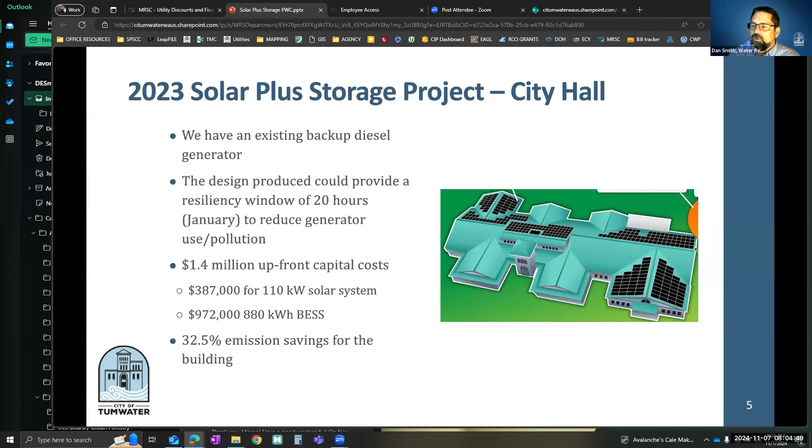It has an upfront cost of about $1.4 million, which is fairly expensive. So we are actively looking for additional grants to help support the construction of that project, plus the project for the library. Overall, they're anticipated at 32.5% emission savings for the building by constructing that project and making it active.

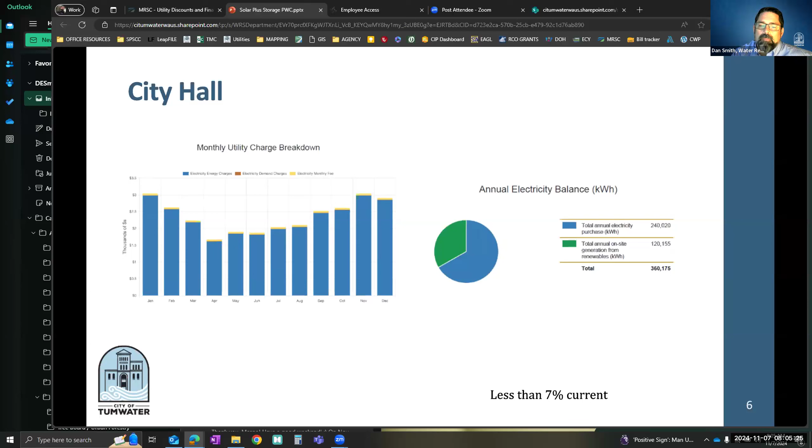What we see here is that the solar power we do have on the City Hall facilities really provides us about less than 7% of our total operating electric needs. Regardless, you continue to build into these systems. The additional solar panels will add additional power, and the backup with the battery gives us power, not necessarily just in terms of power outages, but also when power is less available from a solar perspective.

On the library building, the library is really the only heating and cooling shelter the city has, and there's no current backup power on site. So this project would add an additional resiliency window of about 22 hours.

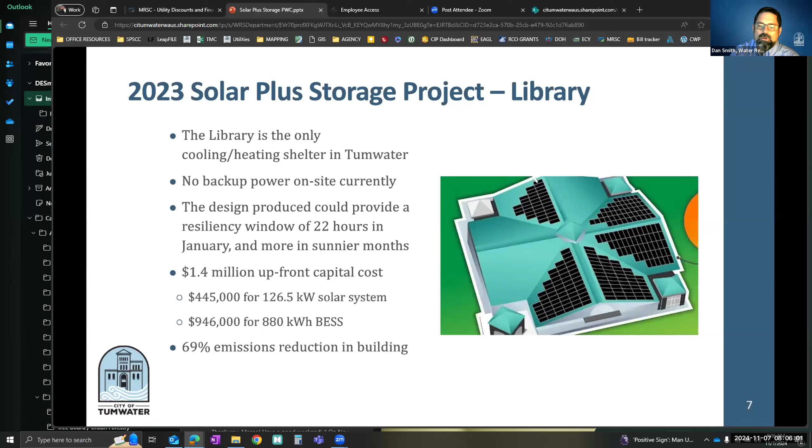It also has a $1.4 million upfront capital cost. As with City Hall, this one has a higher priority, and we're looking for grants to actively initiate this construction. It converts to a 69% emission reduction for the building once this project is able to go active.

Again, you can kind of see what would result in basically a zero power bill in the summertime when those systems are active, whereas City Hall has a much higher power demand, given all the staff and computers and all of the things that City Hall does.

The library has a lower power demand, and these facilities would actually cover their energy demand in the summer, which is fantastic.

So as I mentioned, we're looking to get some grant funding. Ideally they'll cover 70%, if not more, of those total costs. And with the new direct pay program that finance, legal, and lots of folks around the city have helped implement,

we'll be able to get 30% of that cost recouped through the IRA direct pay program. So now moving into the new storage and feasibility project, we're looking at receiving some grant funding of $50,000 with no city match, based on Washington's Climate Commitment Act.

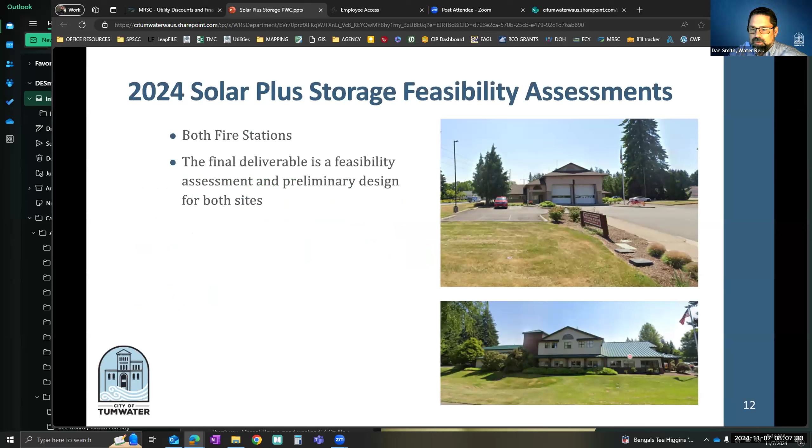So we're looking to put that into work at both the city's fire stations, and very similar to what you just saw for both the library and City Hall, those are the same kinds of feasibility assessments that will be done for both the fire headquarters and the T1 building.

And I know we are going to be working with Olympia Community Solar as part of that project. This is really just a request for the commerce agreement to make sure we can get the grant going. And this is the grant agreement with Commerce.

So the request for you today is to place the interlocal agreement with Washington Department of Commerce for Tumwater Fire Station solar and storage feasibility on November 19, 2024, City Council consent calendar, with a recommendation to approve and authorize the mayor to sign. I believe that's it.

I will just stop sharing and stand available for whatever questions you might have that I might be able to answer.

Michael, I don't think I have any questions. Straightforward, thank you. Appreciate that.

I just wanted to say, when I was reviewing the minutes, I saw something that caught my attention: based on the fleet electrification forecast, the city could reduce its gasoline consumption by more than 70% by 2030, which is amazing. So I just always want to call out the things that we're doing and that we are moving the needle, and just want to recognize your work and Alyssa's work on this as well. So really appreciate that.

So we're moving ahead. All right, well with that we have a recommended action before us. Do we want to go ahead and read that again, or just go ahead? I move that we adopt the motion as presented. I'll second. All right, all in favor say aye. Aye. Aye. All right, thank you, Dan.

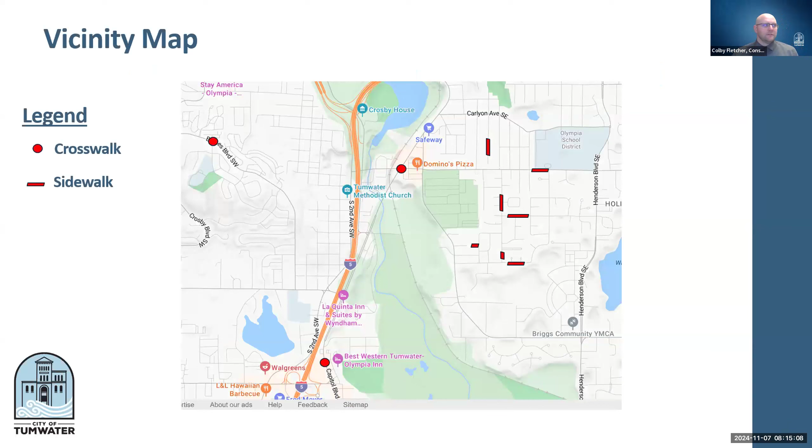So for the pedestrian crossings, let's talk about all 3 that we did. We installed a rectangular rapid flashing beacon right here on Barnes Boulevard at Ridgeview Loop. This one previously did not have any signalized pedestrian crossing, and we did this one specifically because the Tumwater School District approached us about it.

They entered an agreement with us as a city to install this. So this is the one at Barnes Boulevard — it's a solar panel application.

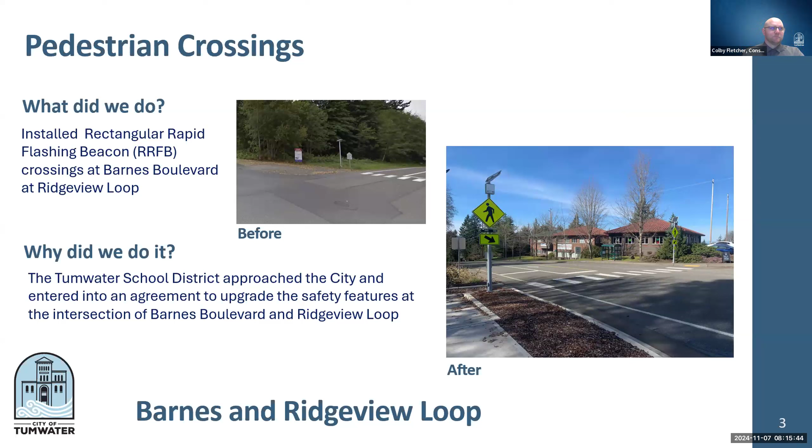The second pedestrian crossing that we installed was right here in front of KFC and Happy Teriyaki on Capitol Boulevard. This is again a signalized pedestrian crossing. This being a multi-lane roadway and heavily traveled,

this one was prioritized, so that's the reasoning behind it.

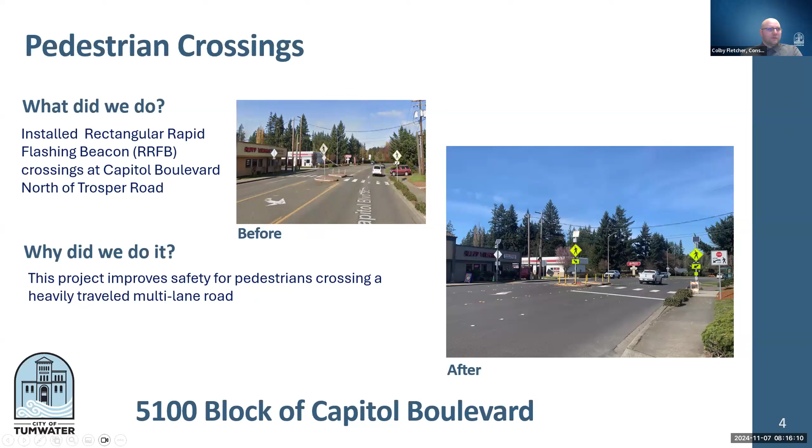The third pedestrian crossing that we installed was the south approach at Capitol and Custer. This one was signalized as part of the actual intersection signal.

My understanding is that we were reinstating this one as part of this project because it was removed from a previous project the city had done, and the funding wasn't secured at that time. So that's the reasoning for this one.

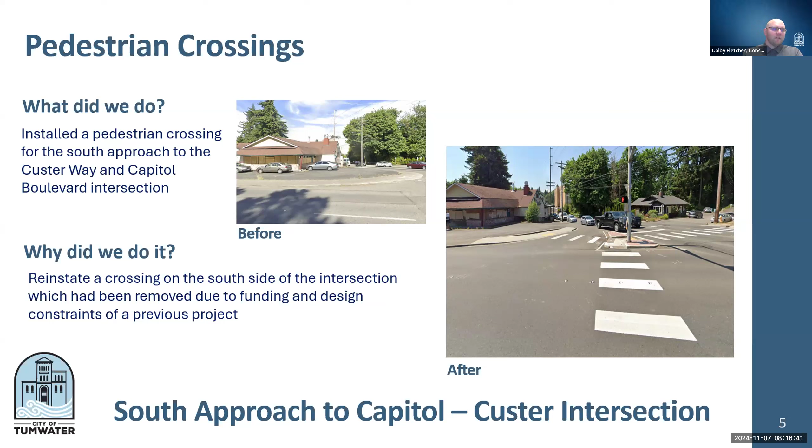Moving along to the residential streets and sidewalk improvements. There were a lot of sidewalk deficiencies that we identified prior to my hiring with the city, taking this project on.

We did this for walking and rolling on residential streets. Prior to my time, the funding was secured, but residential streets are generally harder to secure funding for. Some of our other projects have federal funding, so these were prioritized for that reason.

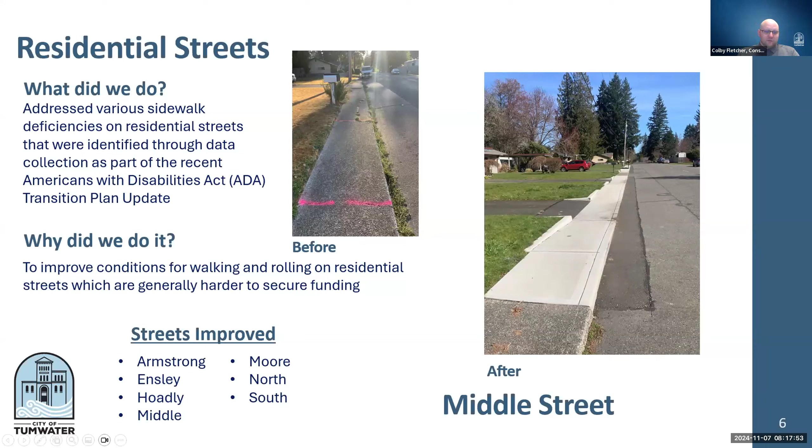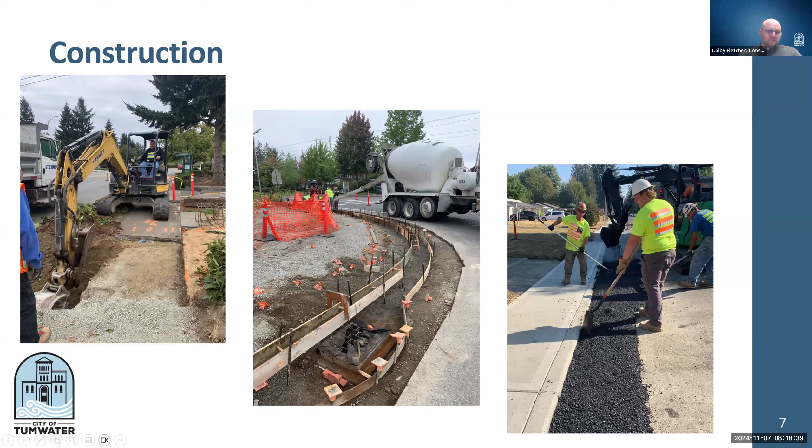Construction summary and project timeline: this was a 30 working day contract. Construction started on September 6th, 2022. Substantial and physical completion were issued on the same day, July 10th, 2023. This project had electrical items, so the reason for the delay was electrical material procurement - there's a big industry lag for materials for electrical items, and not very many fabricators available.

The funding was provided by the Transportation CFP, the Transportation Benefit District, Tumwater School District, and the City of Tumwater. The contract was awarded to Sound Pacific Construction for $493,337, and the final contract total was $497,877.97. So with that, any questions?

I have a question - so the contractor will now be paid for work that was completed in 2023? Is that what we're looking at? It just seems like the contractor waited a year to be paid in full after the work was completed. Has this been normal?

Oh, okay - this is just more or less the final acceptance of work. I probably should have had this scheduled a lot sooner, but with Trosper Road and other projects... No worries, I was just questioning how this all works, no judgment here, just curious about the process. For all intents and purposes, they have been paid - this is just more or less the performance bonding and all that stuff has to do with this.

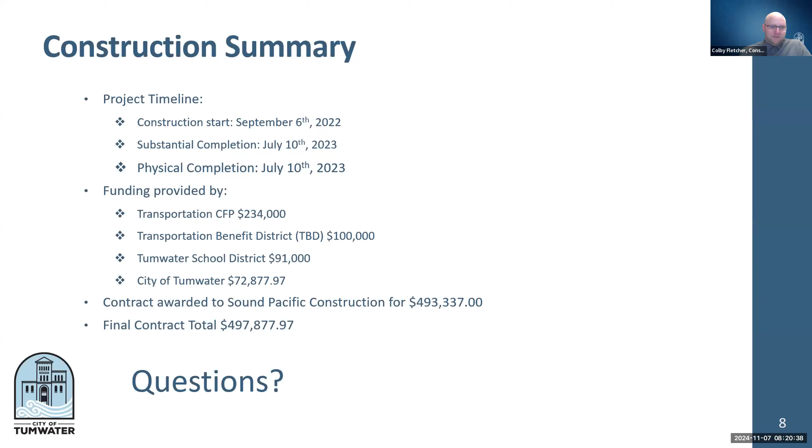So I can go to the recommended action as far as what we're requesting. The staff is requesting the Public Works Committee recommend the city council accept the 2022 pedestrian improvement project as complete and authorize the release of the performance bond as soon as the state of Washington laws allow. Sounds good.

Michael, do you have any questions or comments? I really thank you guys for the one on Barnes especially, because of the kids going back and forth from Tumwater Hill Elementary and the walkers - that's a good one, we utilize that quite a bit. Keeping our roads safe and pedestrians safe is really important, so I appreciate the work done on this project. We want people out there walking, so this is good.

So Michael, we have the recommended action before us. Do we want to read it again?

No, I guess my question is, for the council to accept it, that means we have to accept it on the consent calendar, correct? Well, or we could do it on consideration, but the motion, the staff recommendation is for the consent calendar, correct? Yeah, for the 19th. All right, I'll just say that aloud.

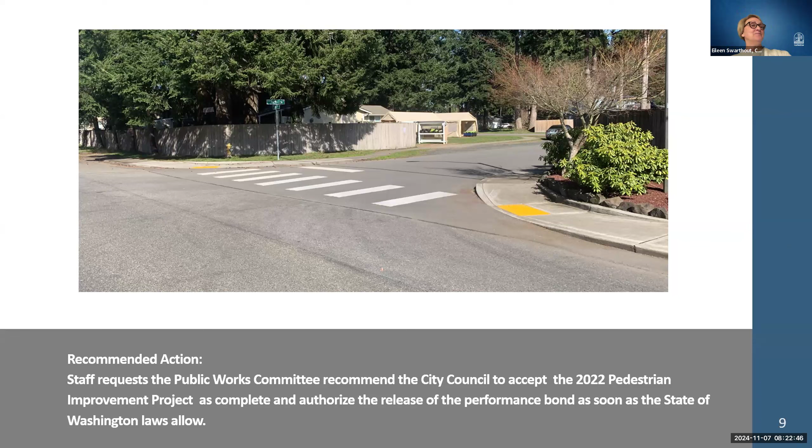All right, moving right along, back to my agenda. So next up, we have acceptance of work with Miles Resources for the 2023 pavement maintenance project, item number 7, and Colby, you're back up again. Yep, for the 2023 pavement maintenance project, acceptance of work, Miles Resources was our contractor for this one.

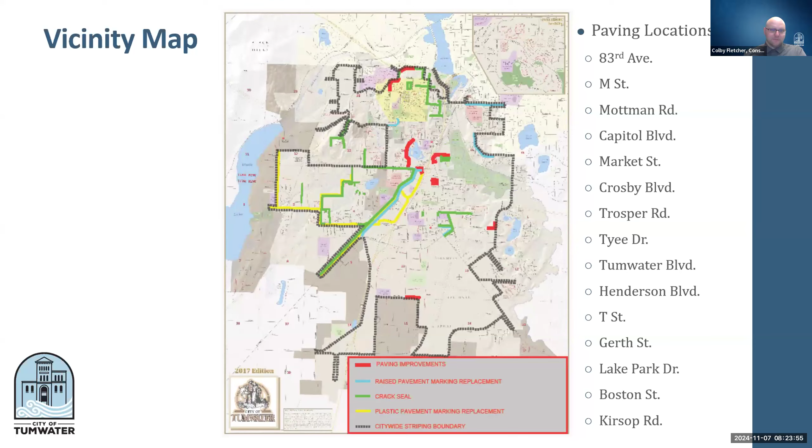Here's the vicinity map showcasing the scope of work on this project. We had paving improvements throughout the city, raised pavement marking replacements, some crack sealing, plastic pavement marking replacement, and some ADA sidewalk improvements as part of this reconstruction and resurfacing. You can see the long list of paving locations, 83rd all the way down to Kirsop Road. There's a lot of paving on this one.

Project overview: this project fits within the city of Tumwater's vision, mission, beliefs. It strengthens the commitment to the city's strategic priorities and goals of 2021 to 2026, creating and maintaining a transportation system safe for all modes of travel, and ensuring sustainable funding to maintain and improve streets and sidewalks.

The scope of work included site investigations and roadway pavement ratings. These roads were prioritized based on poor conditions. The project was a conglomerate of a bunch of different work activities, grouped together logically to make the project more cost effective and efficient for a contractor to secure it. The improved roadways included arterials, collectors, and some residential streets.

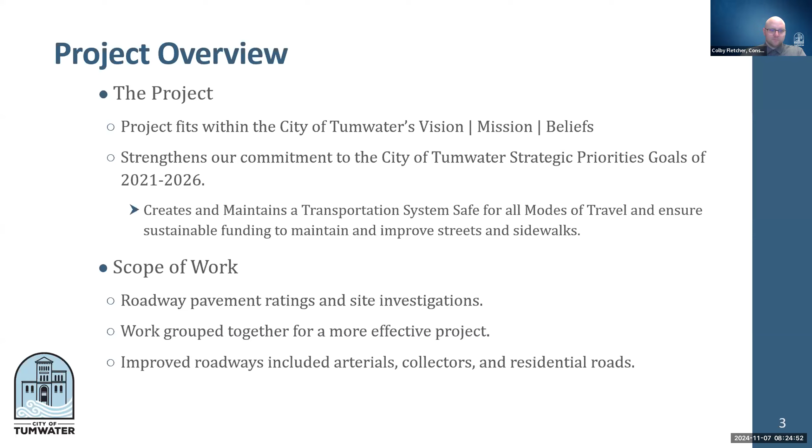What this project accomplished: we ended up paving 7 new lane miles of asphalt roads. There was 55,000 square yards of grinding that occurred to accomplish that - a mill and fill, if you will. We'll resurface that, and 15 tons of roadway crack seal occurred, 4,700 square yards of pavement reinforcement interlayer. We have existing concrete panels underneath our existing asphalt on Capitol Boulevard, so that's why that was needed. We had 5,700 yards of pavement and subgrade subbase repair.

We installed some bioinfiltration galleries, 16,000 new raised pavement markers, 500 square yards of new concrete sidewalk with 17 new ADA ramps, and 137 miles of new paint line.

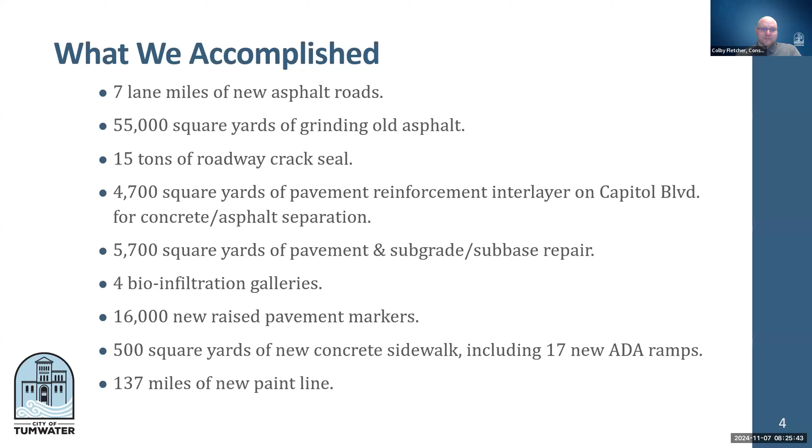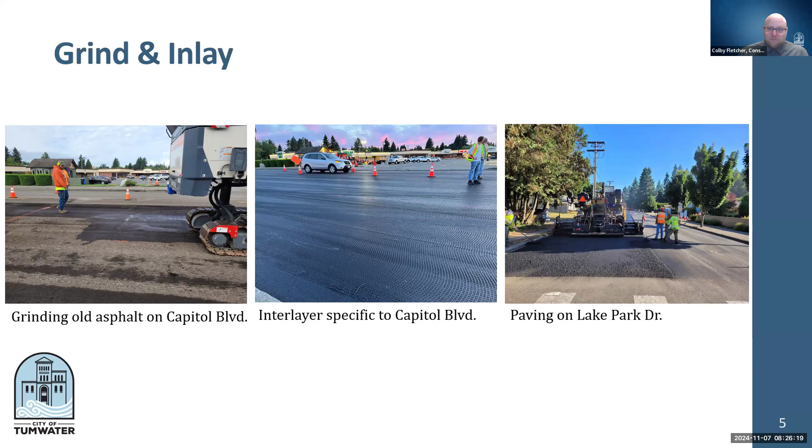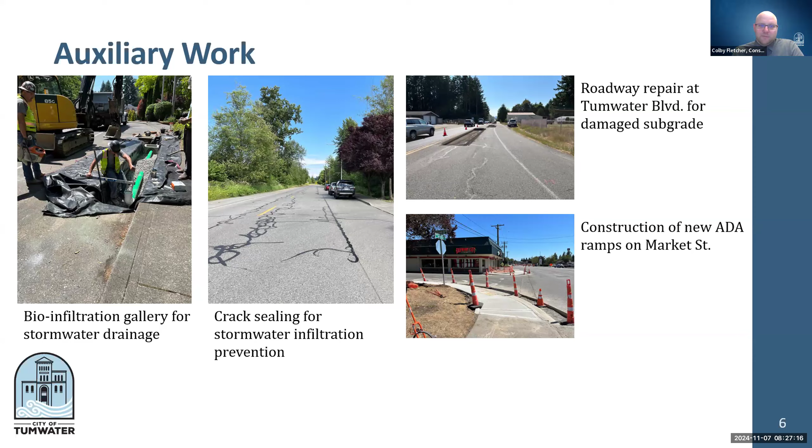Here's some construction photos of the auxiliary work. As mentioned previously, we installed bioinfiltration galleries - some on-site stormwater management installations to help with drainage, shown on the left. The middle photo is crack sealing for stormwater infiltration, making sure cracks don't cause further pavement damage over time due to water penetrating that. The top right photo is the roadway repair for the sub base repair - we see potholes on the roadway, dig it out, put in new asphalt, and seal it before final paving. The bottom right photo is some of the construction of the ADA curb ramps, specifically at Market Street right across from Brewery City Pizza.

So, construction summary, construction timeline. This one was started on June 20th, 2023, and we were able to get this project complete on October 12th of 2023. Physical completion occurred on March 1st of 2024.

I'm trying to remember exactly all the details with that. I think there was some electrical procurement issues delaying that one as well.

The funding for this project was secured by the Transportation Benefit District. The engineer's cost estimate was $3,907,963.96. Miles Resources was the lowest bid at $3,857,000, and the final contract total was $4,171,958.

So I guess my understanding for this project is that we actually had identified several roads as part of the contract, and knowing that we had the prices that we did, we actually ended up going through and change ordering a couple more streets to this project, knowing that we had the budget to accommodate that. So that's why that says after the additional projects were added there.

So there's 2 streets. I can't remember off the top of my head which ones they were, but knowing we were within the budget to do so, 10%, without having to reconsult with city council on that one.

So I guess with that, going to the recommended action before I ask for any questions. The recommended action with this project is staff requests Public Works Committee recommend the City Council to accept the 2023 pavement maintenance project as complete and authorize the release of the performance bond as soon as the state of Washington laws allow. So I guess with that, any questions?

Michael, any questions? No, the only question I had was just about the final amount actually being above the engineer's estimate. But I think that was explained for why we did that. We actually got a really great benefit out of it by utilizing economies of scale while we're already doing that work. Makes total sense.

Yeah, and all those roads that were prioritized, whatever, those were the next ones on the list that we had added. So out of the street, we just added those. I believe it was 2. I can't remember off the top of my head which ones they were, but yeah.

So okay, I appreciate that. I appreciate that we have the Transportation Benefit District and we see our dollars at work for sure. So thank you to Public Works for getting as much done as you can each year on that project, or with that funding. It's very much appreciated.

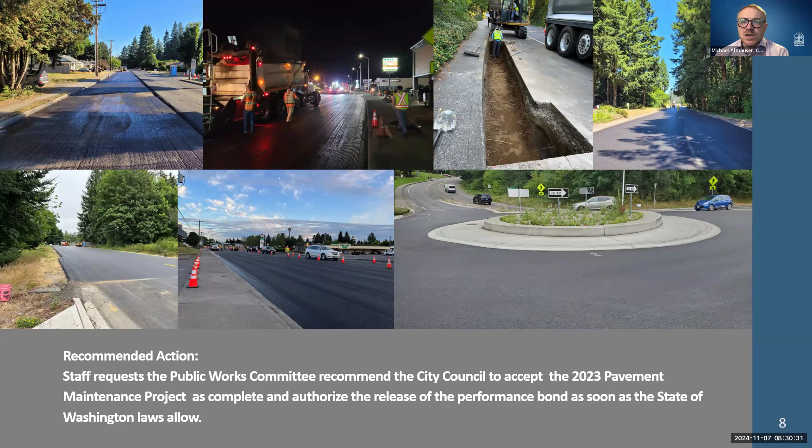All right, so thank you so much for getting that one secured for us and wrapped up. And so now, let's see, we are on number 8, the authority to solicit bids and recommend award for the Percival Creek Fish Barrier Removal Project.

Okay, good morning, council members. I'm Don Carney, Capital Projects Manager for Transportation Engineering, and we'll start the presentation for Percival. Okay, so we're able to see that. Let me get it in presentation mode. Yeah, we can see it. All right, thanks.

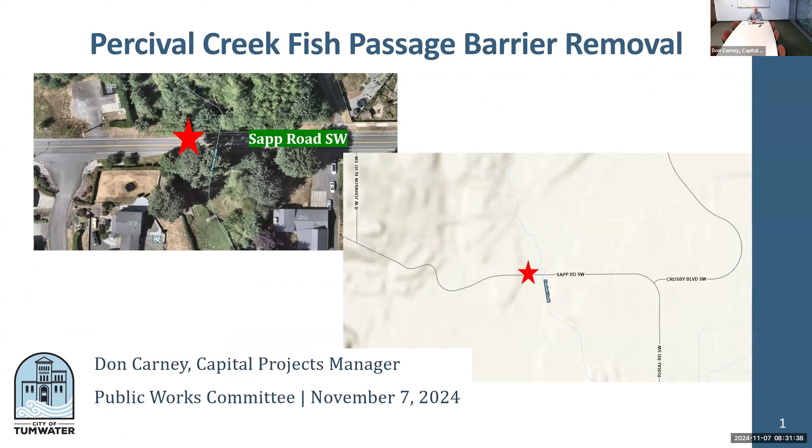This is a long-awaited project here. We've been working on the design and grant funding review and approval for the Percival Creek, and now I'm presenting to hopefully request to go to ad. The project started in November '21, when we signed the service provider agreement with PBS Engineering and their subconsultants, Northwest Hydraulics and Aquaterra. Design was completed June of '24 in a draft form, and then we sent that on to WashDOT for their review and expect their response by November '24. At that point, we're going to turn around and send it back to PBS for final pickup.

The project goal is to replace the Percival Creek Fish Barrier beneath Sapp Road. We're going to install a 19-foot wide by 8.5-foot high, 60-foot long precast concrete box culvert, wing walls, some in-stream large woody material, and road widening with 11-foot lanes, 6-foot bike lanes, and 5-foot sidewalk.

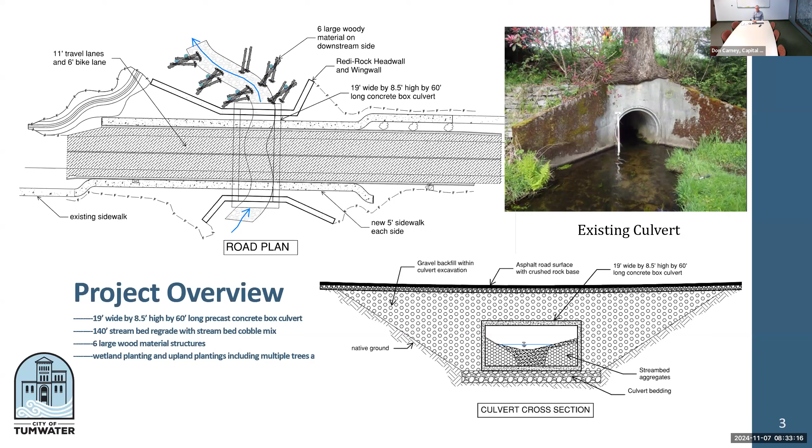Right now, we can see what this picture shows, kind of what the excavation is going to be like — the culvert fitting in there afterwards with stream bed aggregates inside this culvert. The stream improvements, part of the scope of work, is going to be to regrade about 140 feet, and that includes bed sands, cobbles, and channel habitat.

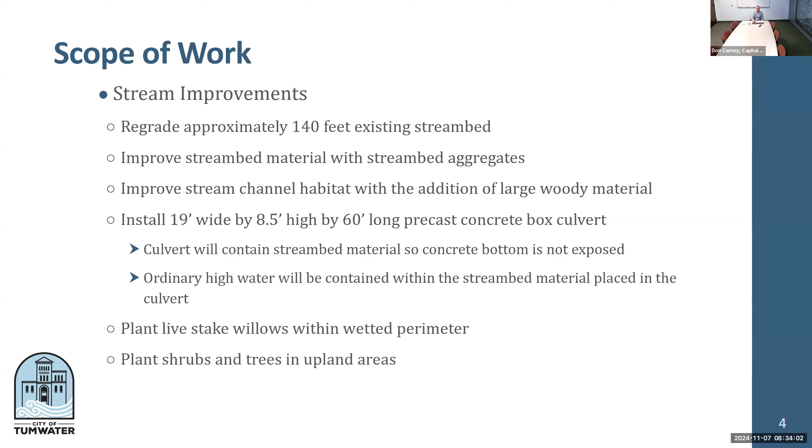Install that culvert as mentioned earlier. The culvert's going to contain stream bed material so the concrete bottom is not exposed. The design preference now is certainly to have no exposed concrete at the bottom, so it's more of a natural habitat for fish. We're going to plant some willows in the wetted perimeter in the lower area, and some shrubs and trees in the upland area.

The road improvements include 11-foot lanes and 6-foot bike lanes. We're going to add a 5-foot sidewalk connecting to the existing sidewalk. Currently we've only got two 11-foot lanes, and immediately after that, small shoulders that go right down to the stream channel bottom.

With this improvement, we've got 22 feet of travel lane, 12 feet of bike lane, and 5 feet of sidewalk. So the edges of the roadway are going to be quite a ways further away than they are currently. It's going to appear to be a lot safer than it is today. Improved storm drainage system, pavement markings, and of course utilities.

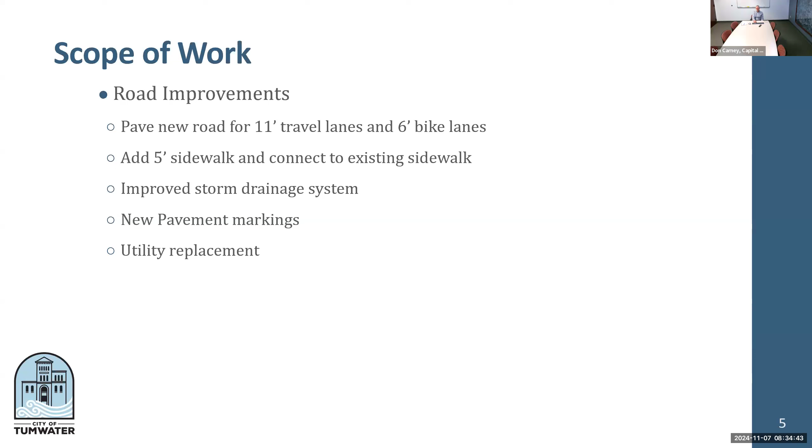Some considerations: because of construction, it's a narrow roadway, so we're recommending a road closure for expedited work and safety. When the contractor gets out there and starts excavating down to the bottom of the culvert, it would be very difficult to maintain a single lane through here, and it would not be safe for either the construction workers or the traveling public to try to keep an open lane through. Also, the work can be accomplished more quickly.

We need to complete this work in a short window. You may be aware there are fish windows given to us by Washington State Fish and Wildlife, and wetlands requirements from the Army Corps, both starting around July 15th below ordinary high. The HPA completion is August 31st, and within the wetted perimeter it would be September 15th. So we need to get down there, put our culvert in, and backfill prior to those dates.

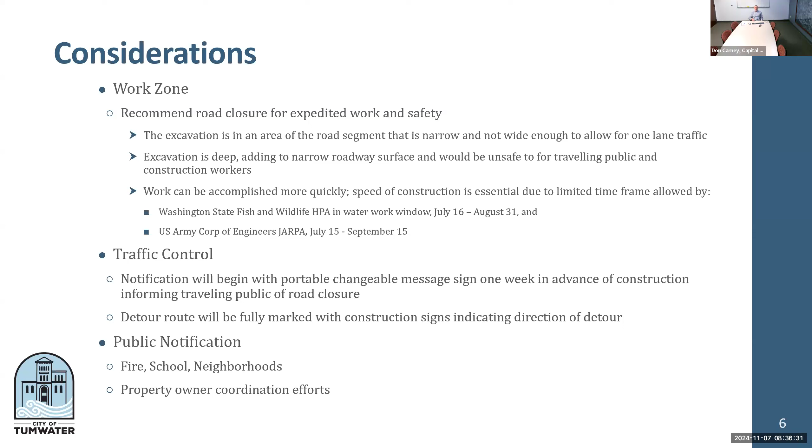A road closure would certainly expedite the work and also reduce the footprint of impacts by being able to close the road. For traffic control, we're going to put out a notification about a week in advance with reader boards or portable message boards warning people of the road closure. Once the project starts, we'll put up construction signs for the detour route, and we'll be notifying schools, fire, and nearby property owners.

The estimated construction cost is somewhere between $2 and $2.5 million. Funding received so far includes $100,000 for right-of-way acquisition. The city did not own enough property to put in a larger culvert and the head walls and wing walls associated with it, so we need to do some property acquisition.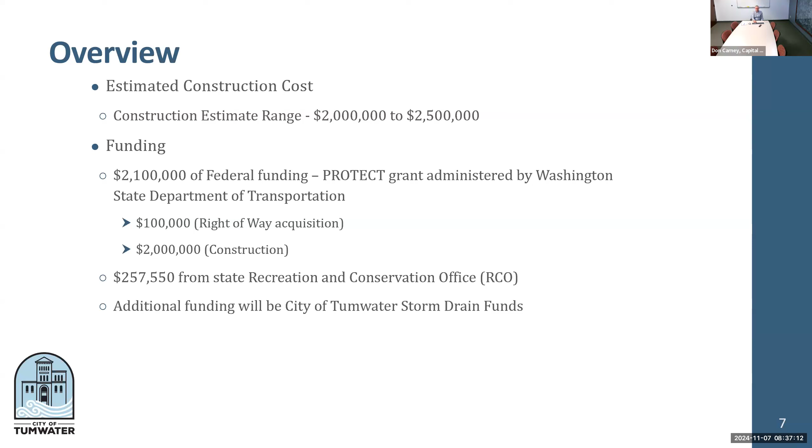We have $2 million from the Protect Fund also for construction, and another grant of $257,550 from RCO for this culvert replacement.

The construction schedule: we hope to bid in December of '24, award the project in January '25. After the award, the contractor will design the box culvert, and the city and state need to review the shop drawings. So the contractor can hopefully start fabricating in spring of '25. Construction will start about June or July and go through September of '25.

We have a 70-day working window for this project. Construction should be substantially complete in September, and we'll be able to reopen the road also in September.

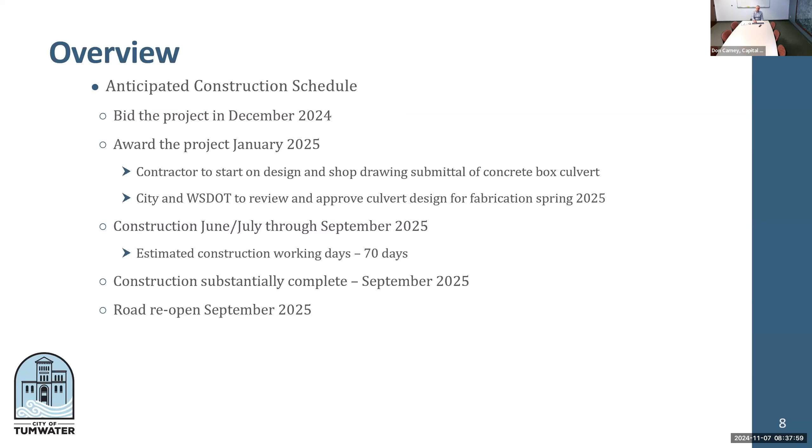Staff request Public Works Committee authorize staff to solicit bids for the Percival Creek Fish Barrier Removal Project, recommend council award, and authorize the mayor to sign to the Public Works lowest bidder, and recommend city council authorize closure of Detour Sapp Road from Crosby to R.W. Johnson. So that's what I have.

Any questions? Michael. Yeah, so the road will be closed for the full 70 days? That is correct, for construction. That's our recommendation. Okay.

And in terms of council action, this motion before us here would go to the full council, and that's the authority to solicit bids and also do the closure. But there wouldn't be another council vote before we would actually begin things, correct? That's correct, we're looking for that to happen at this time. Okay, so would you mind pulling up the motion again, just so we could see the text of it?

Councilmember Althauser, we would have to come back after we bid. We have the low bidder come back for award. Typically, if the bids come back within about 10% of the engineer's estimate, we would come back on council consent for award unless it's pulled or council wants to discuss it, but there will be one more action before construction starts.

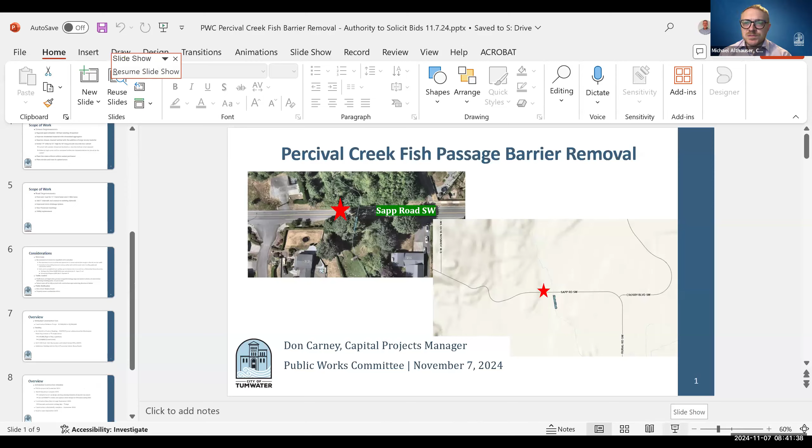I move that—so I guess when would, we don't have a date for a meeting for when we actually vote on this, but the council does have to vote on it, right?

So the council does not have to vote on going to bid. That is handled by Public Works Committee. But the two recommendations would be required by council. So actually awarding the contract is not going to happen for a while because we're going to go out to bid. We'll have to evaluate those before they go to council, likely on consent. Don and I and Bill will discuss action 2. So right now it would just be a recommendation to city council, but we will discuss timing. It may behoove us to go into council sooner on that one.

So it sounds like maybe I have two motions, one where we solicit bids for the removal, items 1 and 2. And then 2 would have to go back to council anyway. One would be solicit bids, that's that motion. 2 would be that we recommend the council award and authorize on the consent calendar. And 3 would be that we recommend the council have a consideration item authorizing closure and detour. Yes, you could do it that way. Either way, we're definitely going to be doing what you're asking, because even if we put the closure on consideration, you would then just pull it, of course. But we do have our marching orders for sure on number 3, it will be consideration.

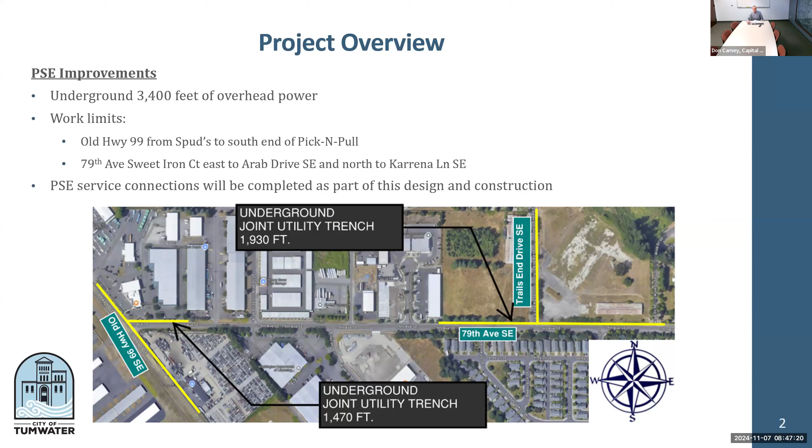PSE service connections will be made part of this design, meaning we're going to be reconnecting to all the businesses as we go underground. We've got to reconnect.

So the agreement, Schedule 74 design agreement with Puget Sound Energy, they'll be providing us with a scope of work, complete design of the underground system, construction plans, operating rights, a work schedule, and a construction cost estimate. The cost of the design has been estimated at $140,000, with a split of 60% to PSE for $84,000, and the city picks up the remaining 40%, which is $56,000.

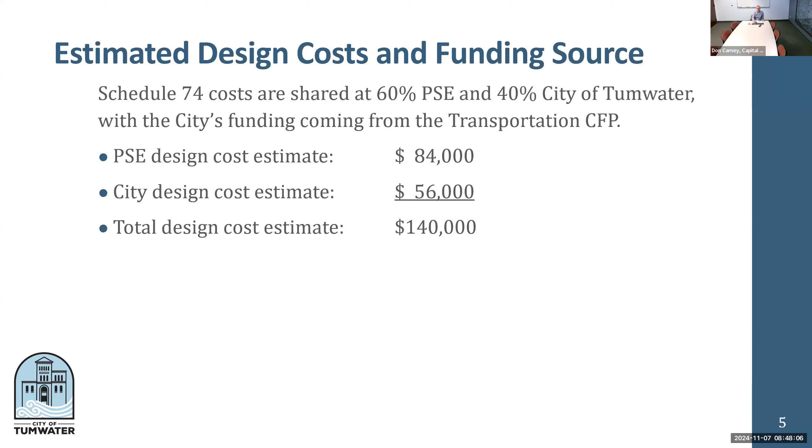The next phase is the construction agreement. So we're just asking for a design agreement right now with council. PSE's responsibility on the construction agreement is to provide design of all underground facilities, supply conduits, transformers, install the electrical system, coordinate complete changeovers, as mentioned, service connections, remove all overhead utilities including poles, and provide project inspection services.

So the most recent project, if you're familiar with Israel Road, almost everything is down. Israel Road right here in front of City Hall was also a Schedule 74, and it looks much better with everything out of the way. We're expecting the same down at the 79th roundabout.

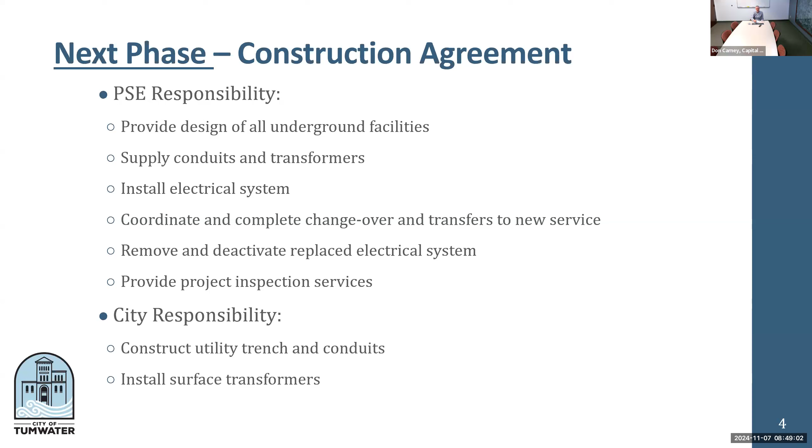Our responsibility is going to be to construct all the construction, install surface transformers. What we're looking for, the recommended action, is staff requests Public Works Committee recommend City Council approve and authorize the mayor to sign the Puget Sound Energy Schedule 74 underground conversion design agreement to design the utility underground conversion for the old Highway 99, 79th Avenue roundabout project.

Any questions? None for me.

Not at this point. I was just saying about the construction piece of it, but this is excellent that we're continuing to work on these projects to underground as much as we possibly can, the underground utilities. So I appreciate that with this project as well. Thank you for that.

All right, so we do have the recommended action in front of us. Request that Public Works Committee recommend the City Council approve and authorize the mayor to sign the Puget Sound Energy Schedule 74 underground conversion design agreement to design the utility underground conversion for the old Highway 99 and 79th roundabout project, and place it on the November 19th, 2024 City Council consent calendar.